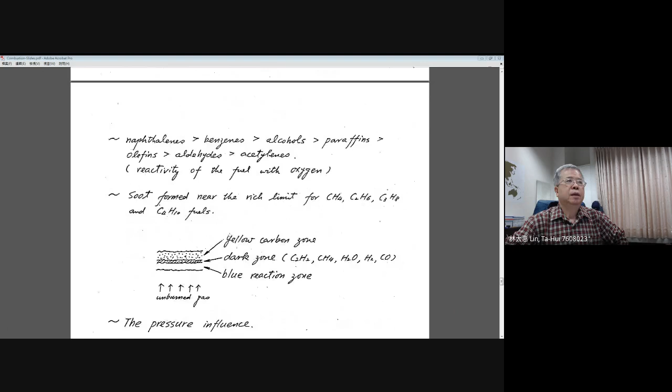Which means when you look at the molecular structure of different kinds of fuel, the soot formation depends directly on the reactivity of the fuel with oxygen by this series. Actually, naphthalene has much more potential to produce soot, but acetylene has less.

And usually from the flame structure, as we described earlier, you may see the soot usually forms near the rich limit for methane, ethane, propane, and butane, because these four hydrocarbon fuels have lower molecular weight, and the carbon-hydrogen ratio is not too high. Which means you can have soot only in very rich conditions, very close to the rich flammability limit. The rich limit means if you increase the fuel more, you may not have a flame for premixtures because it's too rich. So for these four hydrocarbon fuels, it is very hard to have strong soot formation unless you go to very rich conditions.

From our experiment, when you generate a planar premixed flame, for example like this, you have an unburnt premixture supplied from the lower burner, and you have a stagnation point flow, and in this stagnation point flow you generate a planar premixed flame, and you try to make the burning richer. In this case, from our previous experimental results, you can see there is usually a blue flame here. The blue flame exists in front of the yellow flames, and between the blue flame and the yellow colored zone, there is a dark zone.

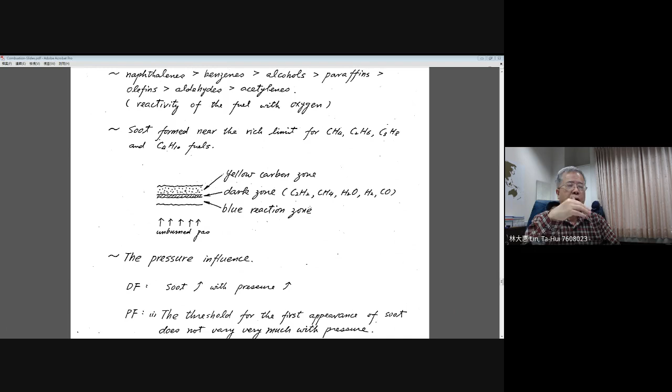And usually, if you do the measurement with GC or laser diagnostics, you can find that in this dark zone you may have a high concentration of these species, as I list here. And downstream of the dark zone, you will find there is a yellow carbon zone. That means there is a soot layer. The soot layer always exists behind the blue flame for a rich hydrocarbon flame.

And if you further look at some physical parameters, you find the pressure has some influence on soot formation for diffusion flames and premixed flames. If you increase the pressure for a diffusion flame, usually the soot will increase. Soot formation occurs on the fuel side of the diffusion flame, which means in the rich fuel region they don't have oxygen. Therefore, if you increase pressure, you increase the interaction rate between the soot particles, and they have a big chance to grow bigger and bigger. Agglomeration becomes more possible for the growth of soot.

But for a premixed flame, it depends on the situation. The threshold for the first appearance of soot does not vary very much with pressure, because the initiation of soot formation for a premixed flame is governed by the mixing ratio and also the temperature.

Pressure may not be the important one, but if you do have carbon formed, then the pressure increase will give you the chance to increase the soot formation. And the preheating of your premixed gases will increase the overall temperatures. Then you will shift the threshold for soot formation to a slightly richer premixture. That means the preheating of premixed gases will suppress the soot formation.

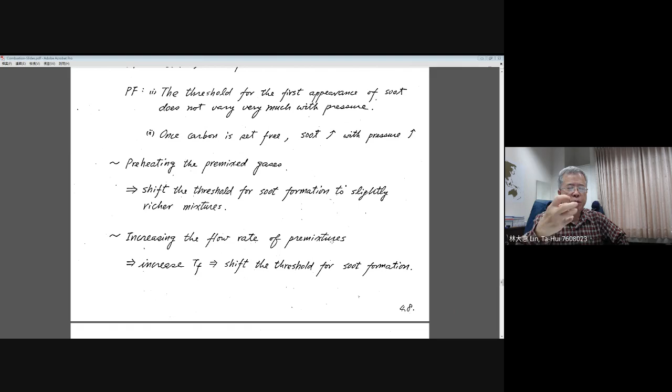Now, when you increase the flow rate of the premixture, that means that you reduce the residence time. You reduce the residence time, and at the same time, you may increase the flame temperature, because you input more fuel into your combustor. The heat release becomes larger for a given control volume. With these two factors, temperature increase and residence time reduction, the soot may not be formed as easily. Then you will shift the threshold for soot formation for the premixed flame.

But near the threshold condition, this is very important. You need to understand that near the threshold conditions, the temperature is a key factor, because it will enhance the oxidation process. But for very rich mixtures, when the temperature becomes high, it will promote the soot formation. On the rich side, you do not have enough oxygen, so high temperature cannot help the oxidation of soot, but it promotes the hydrocarbon fuel decomposition, and produces more soot.

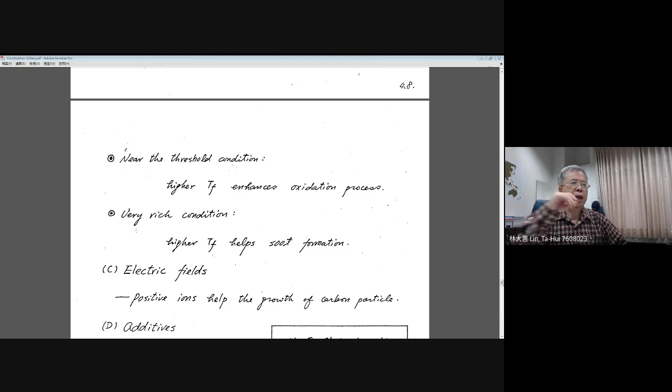This tells you about different kinds of situations, for example, different mixing ratios. Under a threshold condition, high temperature is good for reduction of soot, but for rich conditions, high temperature will help the soot formation. Just a few literature sources give you the result. Electric fields: if you can provide positive ions, those ions will help the growth of carbon particles. There are also some interesting results from previous experimental work. Adding additives will give different kinds of results.

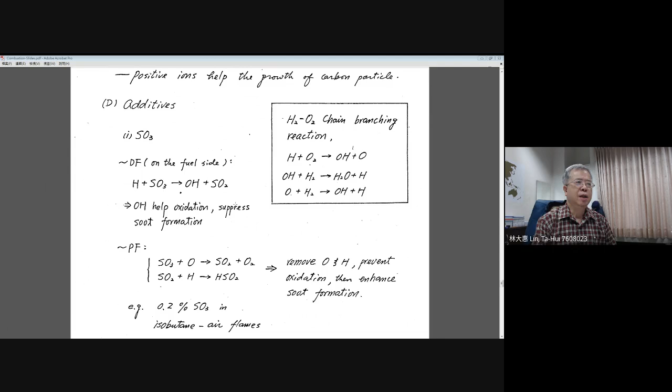Let's see, if you apply SO3 into premixed and diffusion flames, you find out they will have different kinds of results. I hope you remember, as we described earlier, in the combustion process there are three important active species: hydrogen, OH radical and oxygen radical. These three radicals are the most important species to promote the multi-step chemical reaction through the branching chain reaction.

But if you look at the influence of SO3 additives, you can find out that if you put it into the fuel side of your diffusion flame, the SO3 will react with hydrogen to become OH. Now there is oxygen, but this oxygen comes from the SO3, and this OH radical will cause oxidation, so the soot will be suppressed. This is the influence of SO3 on the fuel side.

However, if you put this SO3 species into the premixed flame, it will go through these two reactions. These two reactions absorb the oxygen; you change the active oxygen species to O2, and H is absorbed as HSO2. That means you remove the O and H radicals, and this will prevent oxidation of soot. Then the soot formation will be promoted.

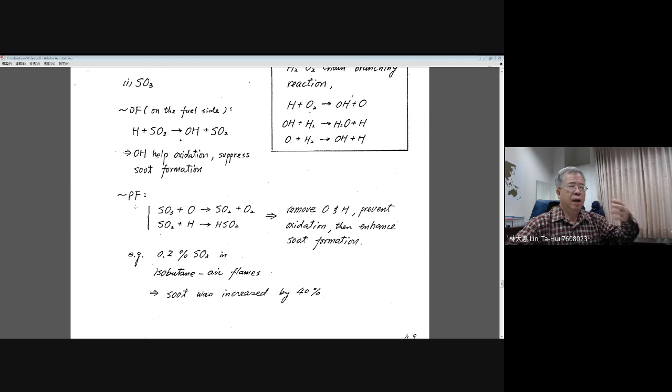Experimental results tell you that if you just add 0.2% SO3 in isobutane-air flames, the soot will be increased by 40%. This means that the influence of SO3 on the diffusion flame and the premixed flame plays different kinds of roles, depending on the chemical reactions you have on the fuel side of the diffusion flame and in the premixed flame.

Additionally, you can add some salts, for example, sodium, lithium and cesium salts. They will shift the soot formation to the richer side. That means they have a strong inhibition on soot formation. The chemical reaction occurs this way.

For lithium, it reacts with water and provides hydrogen radicals, and the next chemical reaction will produce the OH radical. H and OH radicals cause oxidation, so they can suppress the soot formation. But there is an exception for barium.

But barium, they first reduce the soot to a minimum value, but then increase soot formations. Okay, it depends on the condition you may have, especially for the mixing ratio.

Okay. Now let's look at the influence on the formation of the particles, the particulate. Later on, I will give you the picture to show the so-called coke from liquid hydrocarbon pyrolysis. That means we are looking more closely at the liquid injection through the spray atomization process.

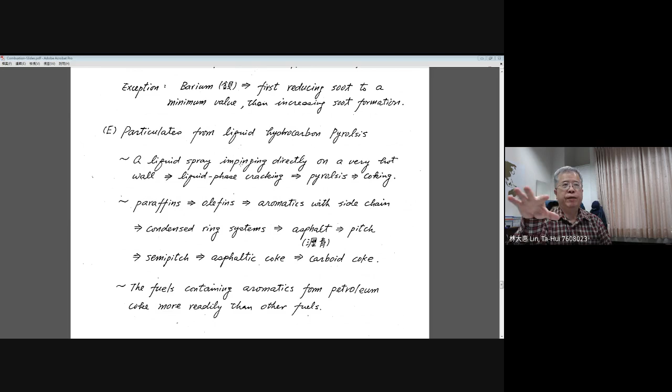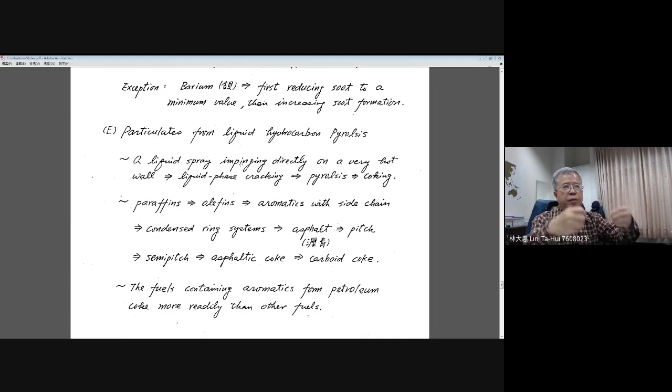Usually in our previous discussion, we were focusing on the soot formation in the gas phase, right? And in the gas phase, the soot formation initially starts from the decomposition of your hydrocarbon fuel. Then they release carbon atoms, and the carbon atoms can collect together to nucleate carbon particles in this process.

But for hydrocarbon liquid fuels, if you have a liquid spray impinging directly on a very hot wall, they will experience the so-called liquid phase cracking and go through pyrolysis. Finally, they release the hydrogen, then they produce so-called coking. The liquid phase cracking follows this way from the paraffins, olefins, continuously going through these procedures to become a carboid coke.

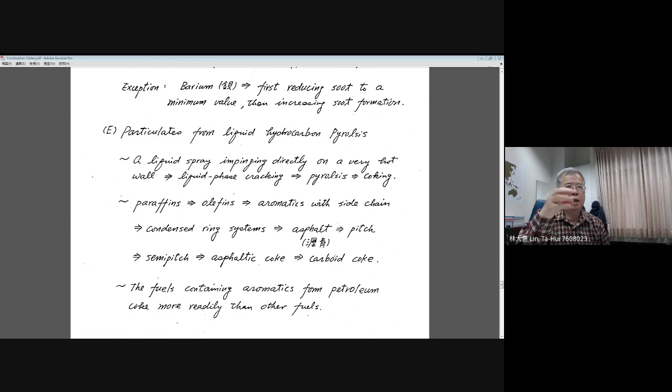And in this process, they release the light hydrogen radicals, and all the carbon remains and becomes a solid on the high temperature surface of your combustion chamber. And usually fuels containing aromatics form petroleum coke more readily than other fuels.

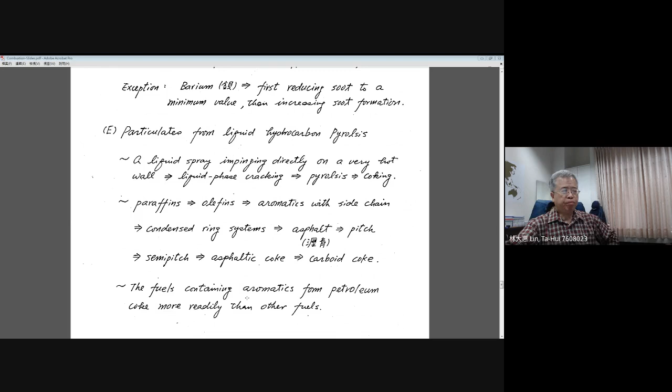Since you have injections, sometimes the spray may not have good atomization. The liquid fuel will attach to the burner head, and since the burner head experiences a high temperature, it will go through decomposition and cracking of your liquid fuel, and then finally you will have some coke attached to the burner exit.

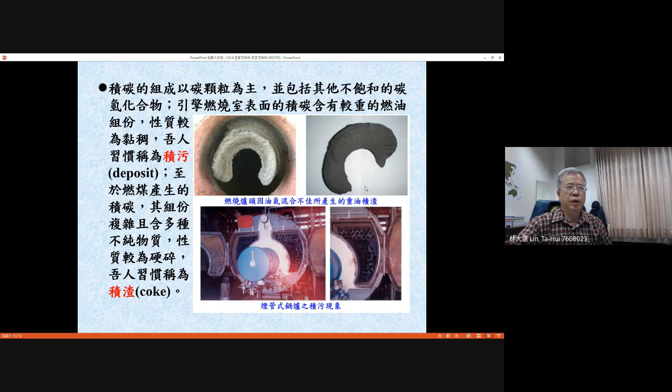And we actually did some experiments to check the deposit of gasoline. I can show you. Sorry, I moved too fast.

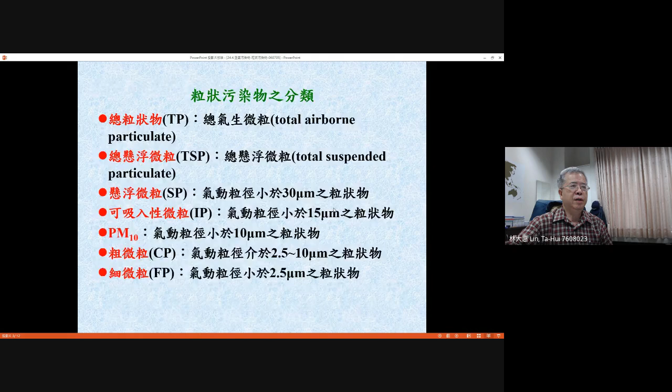For the gasoline spray burning, the gasoline has a lower boiling point and is easier to be gasified.

Then for the spray flame, usually before the spray goes through the spray flame, they are already gasified, which means that in the environment downstream of the premixed flame, actually only gas exists, the carbon particles in the gas phase, and when those soot occurrences appear, they will hit the plate, then they will form on the surface of the plate. The distribution is very uniform, but basically it gives you the idea. It is just the attachment, the deposit of your solid particles, carbon particles, on the plate.

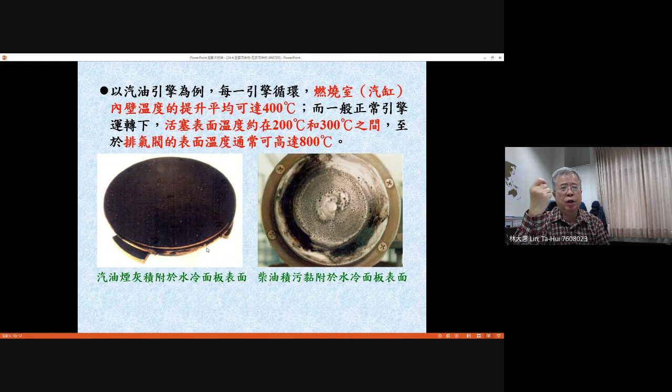But for the diesel, actually they cannot finish the gasification of the diesel droplets. They still remain liquid droplets, and then those liquid droplets impinge on the plate, and in a very short time they go through the cracking process. Then they will produce the coking on the plate. Okay, they are completely different. This is an example to give you some experience of the behavior of coking with liquid petroleum fuel.

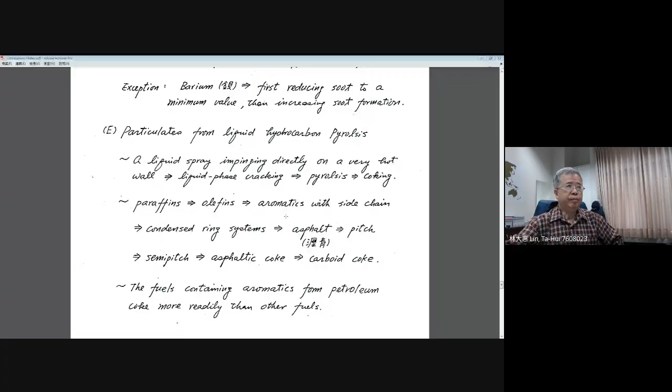Now we go back to our lecture slides, and we will continue, because we finished the discussion on soot formation, and we need to go to the next subsection to let you know how we can remove the particulates from our emission process. There are several pieces of equipment to be used. I will show you quickly.

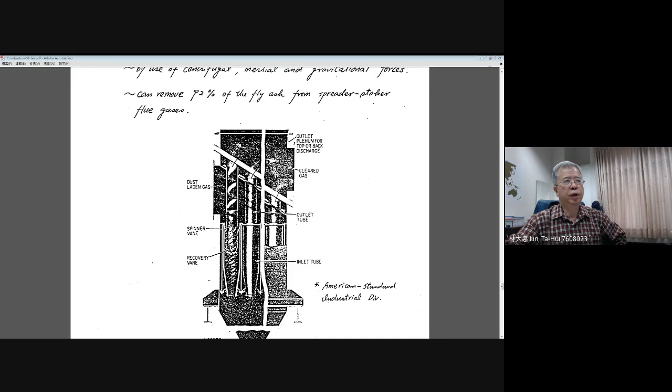The first one we call mechanical collectors. Basically, these kinds of mechanical collectors operate based on centrifugal, inertial and gravitational forces. Let me try to explain. If you look at this picture, this is a typical mechanical collector. The dust-laden gas coming from the combustion chamber flows in from the left hand side, and when it moves into the collector, it will first flow downward, then reverse and flow upward through a spinning vane.

By this change of flow direction, you see this gas has some dust, right? There are particles of different diameters laden in the flue gas, and by changing the flow direction, large particles will have inertia and be influenced by the gravitational force. They will fall down to the hopper. The flow will continue to change direction, then flow upward through the spinning vane to produce the centrifugal force, and this centrifugal force will additionally move the medium-sized particles to attach to the surface of the vane, then they will fall down because they lost their inertia.

Later on, the cleaner gas will continuously flow upward through the upper deck, then the clean gas will flow out. By this flow arrangement, inertia and gravitational force act on the flow to let the larger particles fall down to the hopper, and later they use a centrifugal force to push the medium particles to attach to the surface of the vane, and they will fall down because they lost their inertia, and those medium-sized particles will be collected. But very tiny particles will still flow with the gas and move out.

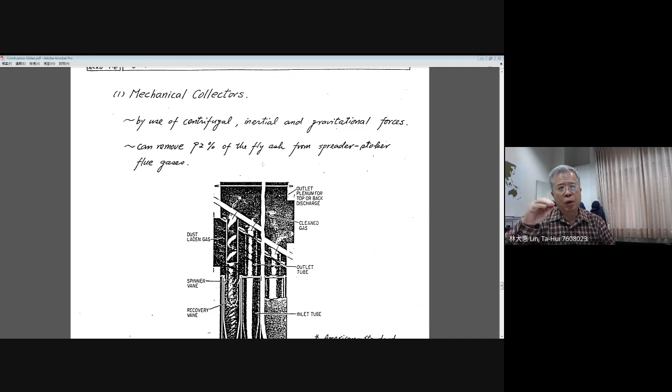This means that by using mechanical collectors, they can remove only 92% of fly ash from the spreader stoker flue gas. Spreader stoker flue gas usually contains a large amount of particles, and mechanical collectors do not have very high efficiency, just 92%. The 8% of the fly ash may contain smaller particles, and they will flow out. But for mechanical collectors, the cost is less, only 1/8 that of electrostatic precipitators or baghouses. But electrostatic precipitators and baghouses have a higher efficiency for removing the particulates.

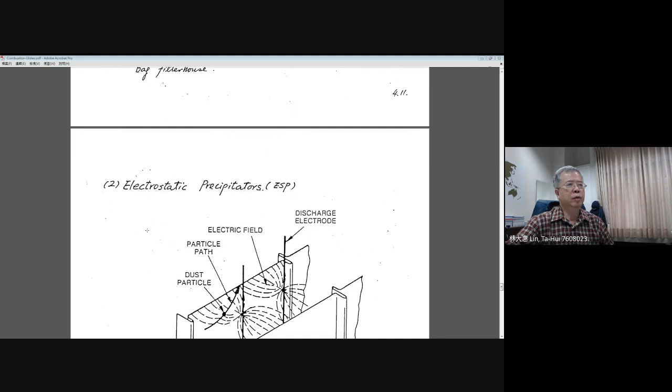Okay, here there's a discharge electrode. You have discharge electrodes, then they will produce the electric field based on the conjunction of the plate with the electrode. Then you will produce the electric field. Initially the particles inside of your flue gas were charged. When those particles move into the region between these two plates, they will change their direction of flow and attach to the collecting plate.

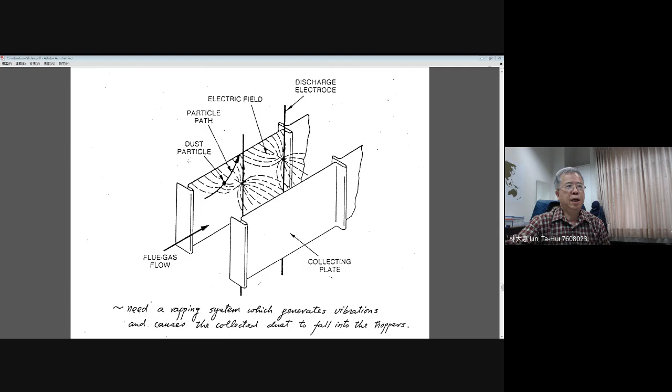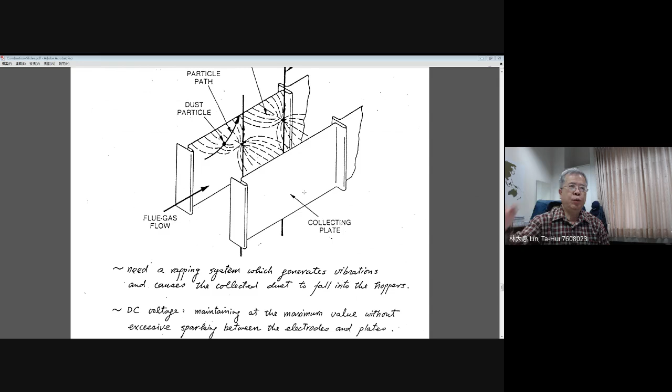And this tells you the dust particles will move along this path and attach to the collecting plate. By this influence, the charged particles will follow the electric field and attach to the plate. And after a certain time of collection, you can shake the collection plate to let your particles move downward. Okay, here they tell you you need to have a rapping system. Then it will generate the vibration and cause the collected dust to fall into the hopper.

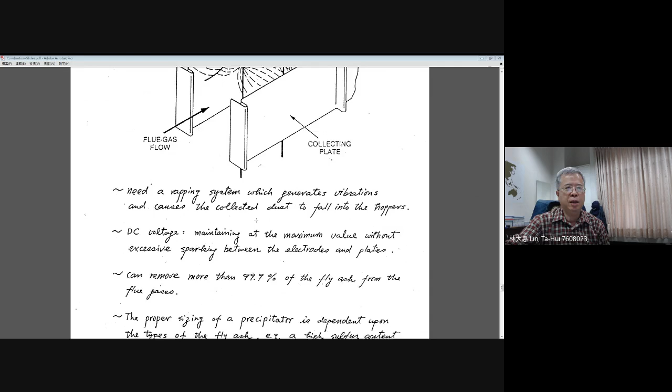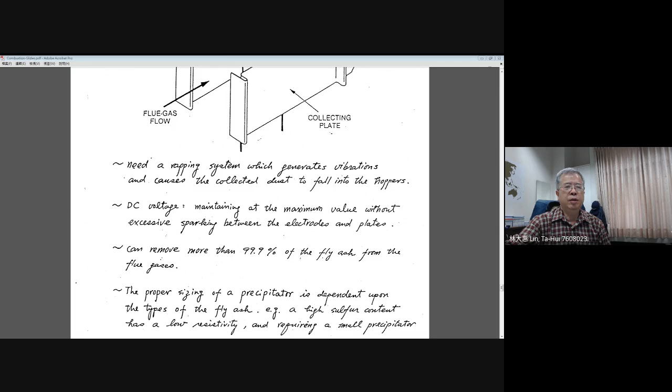Okay. And this equipment can remove more than 99.9% of fly ash from the flue gas. And this is a very nice efficiency. Usually, large fire power plants are equipped with this ESP to remove the particulates completely. Therefore, people usually believe only a very small amount, only 0.1%, very tiny particles flow out through the chimney of

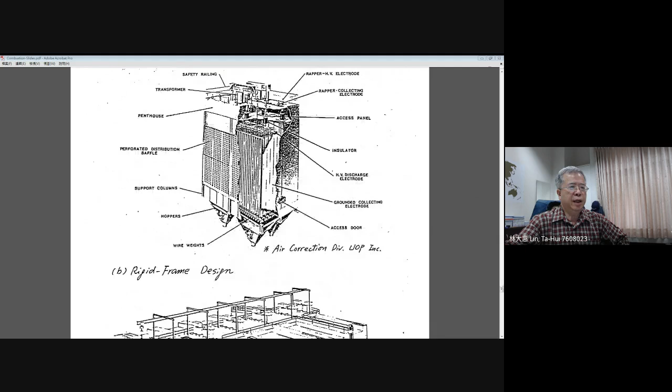the fire power plants. Okay, and here they tell you the proper sizing of the precipitator depends on the type of fly ash, especially high sulfur content has a low resistivity and requires a small precipitator. Then I will tell you how it works and the influence on that. There are two different kinds of design. I skip it to not give you the detailed description, but I want to tell you how to arrange those equipments for the flue gas.

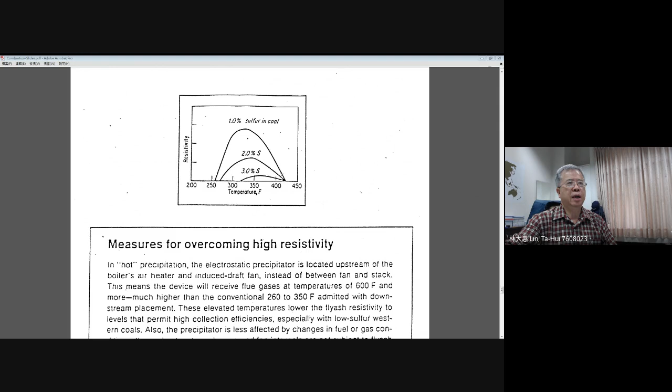Okay, this is a typical example. If you have a lower sulfur content, for example, you use coal as a fuel for your furnace or your boilers, then you will find out the resistivity distribution is something like this in the temperature range. Actually, they will have a higher resistivity in a larger temperature range. But if you increase the percentage from 1 to 3%, you will find out the resistivity becomes smaller, and the temperature range becomes smaller.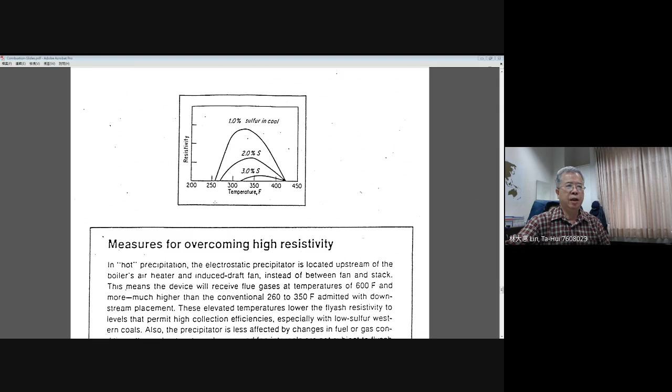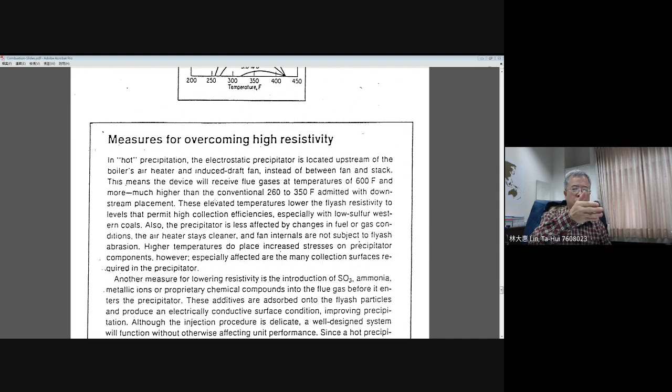Okay, which means if you have a larger sulfur content, then you will have a high collection of the soot particles. Then usually people try to arrange their precipitators very close to the boiler outlet. We call this a so-called hot precipitator. Hot precipitator means that it will experience the flue gas with a high temperature.

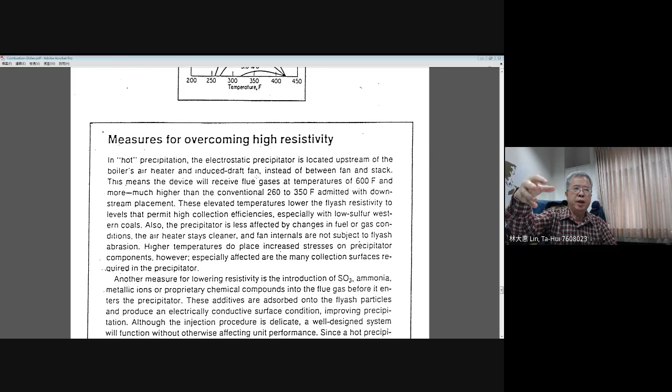And the precipitator is located upstream of the boiler air heater and induced draft fan, because the flue gas will flow out through the boiler, then go to the air preheaters to preheat the inlet air for the boiler. Then it will go through the induced draft fan to the chimney and flow out.

Okay, but they try to arrange the precipitator ahead of both the air heater and the ID fan, because it will experience a high temperature, around 600 Fahrenheit, and sometimes it is more efficient to collect the soot particles. In this situation, the particles still contain a certain amount of sulfur, because they do not go through the desulfurization. Usually the desulfurization is put very downstream in the whole stream.

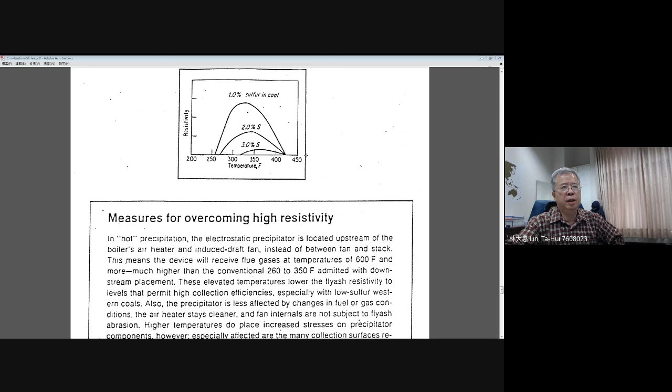Okay. So the higher temperature will give you a higher efficiency to collect those particles. For example, for this range, 450, when you go further, the resistivity for your coal particles, the carbon particles, is almost near zero. They are easy to be collected.

And this is good for the operations of the air heater and the induced draft fan. Since before the flue gas flows into the air heater and the ID fan, all the particulates, soot particles, are collected by the precipitator. Then the flow will be purely a gas flow.

If you cannot remove those kinds of particulates, then those particulates, as I mentioned, even though their size is very small, the flow velocity will carry them. Then they have a certain amount of momentum when they impinge onto the surface of the air heater or the blade of the ID fan.

They will produce some pitting and a corrosion problem. But for the hot precipitators, there is another problem you need to solve, because they put the precipitators closer to the boiler exit. That means the flow has a higher velocity. The most important thing to consider for a precipitator is the flow time.

Since you have a plate, right, you need a residence time to let your particles change their directions and be attached to the surface of your plate. Then for the flow time, if you have a higher velocity, you need a larger plate to accept the flow and reduce the velocity. Then they will be more attached to the surface.

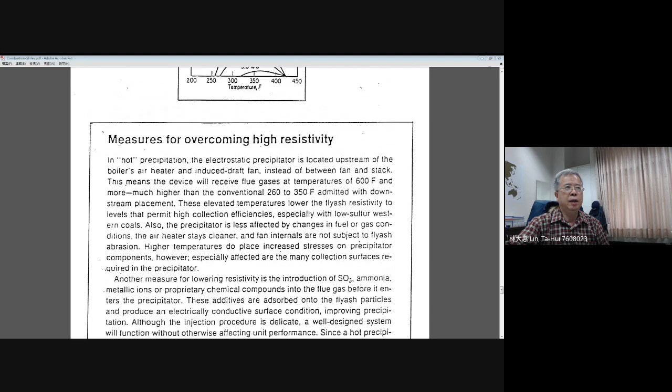Then people try to introduce SO3 or ammonia, those agents, and they will produce lower resistivity, as I explained earlier. In this case, when you go to the lower temperature regions, if you increase the sulfur content, you will reduce the resistivity of your particles, and that will improve the collection efficiency. This is some practical arrangement for precipitators.

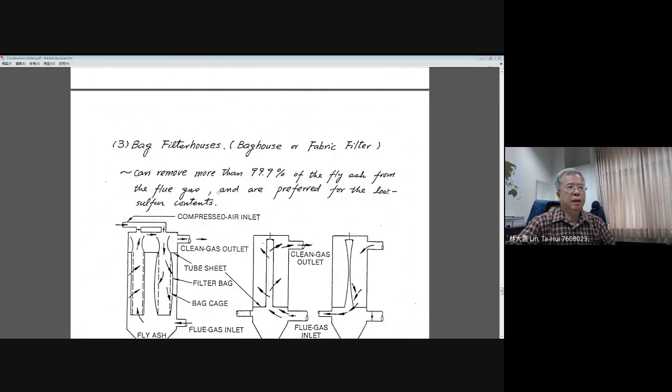Now the third one is still a useful one. It is the baghouse filter, or we call it a baghouse or fabric filter. They still can have a high efficiency. They can remove more than 99.9% of fly ash from the flue gas, and are preferred for low sulfur content. We already emphasized precipitators are good for the high sulfur content, which means they are more likely to be used for coal burning.

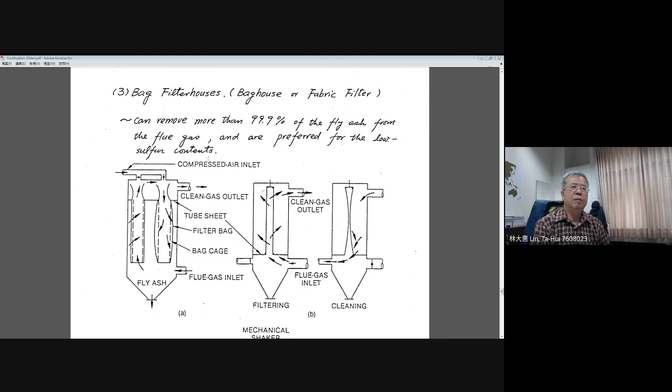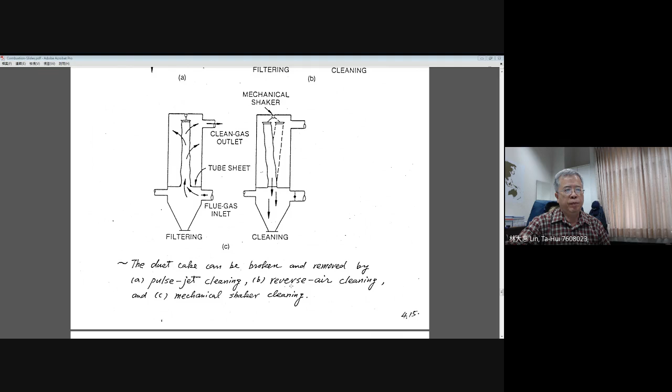But if you do not have a large amount of sulfur content, you may use the baghouse. Here this is the mechanism for different kinds of applications. For the baghouse, figure A represents pulse-jet cleaning. Figure B represents reverse air cleaning. The final one is mechanical shaker cleaning. I will give you an example to explain it.

And the clean air will go through this way and flow out. This is the clean gas outlet. The other one is working on the cleaning process. The left-hand side tells you that you will have some soot particles attached to the surface of your bag. Then in the second step, you change your flow condition.

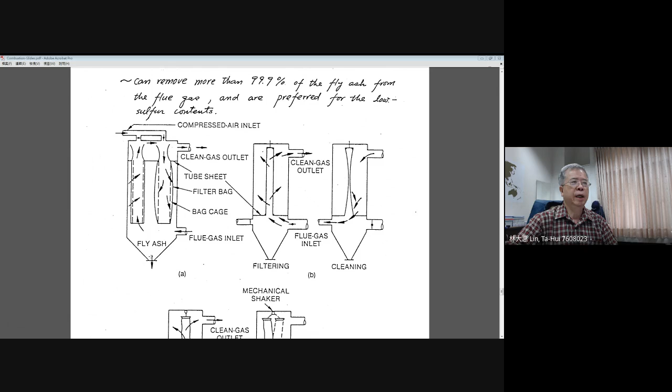Now you use compressed air from the top part. There is the tube; the compressed air comes in, flows into the interior of your tubing, and flows outward through the filter surface. By this flow motion, the compressed air will push those deposited particles to drop to the hopper. Therefore, you may have a series of bags acting on the collection of your particulates, and the other one just pushes out those deposited particles to fall down.

Okay, by this way, they can clean out all the particulates and then the clean gas moves out. Okay, and then the right-hand side, figure B, tells you they are separate. Okay, and they use a very similar way. This figure tells you flue gas comes in and flows out, and the particulates will deposit on the surface of the bag.

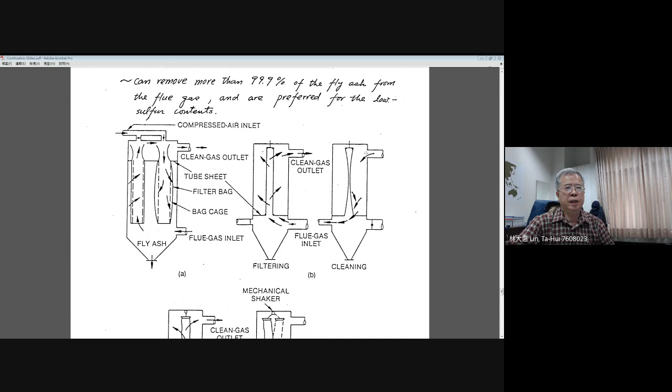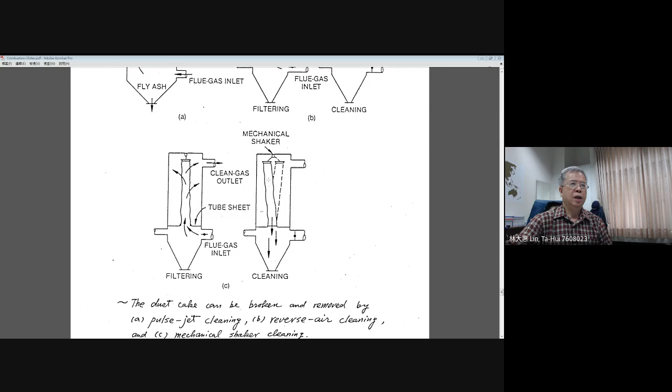And on the right-hand side, they go to the cleaning process, then they have compressed air move from the other way and push those deposited particles to fall down. Okay, and the last one, they just use a mechanical shaker to shake the bag, and the collected particles will fall down.

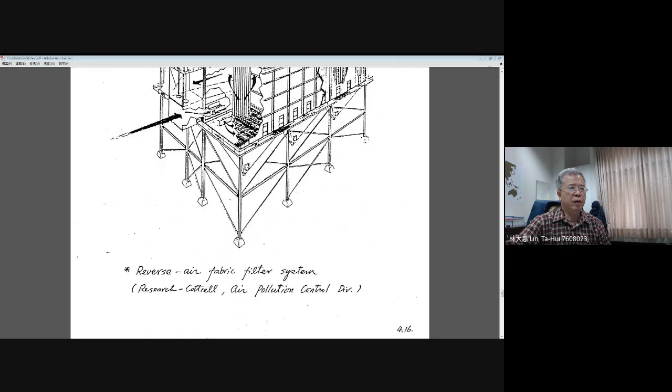And the most important thing there is the design to achieve higher efficiency based on the air-to-cloth filtering ratio. Depending on how much flue gas you have, you use the gas volume flow rate divided by the bag surface. The typical design for high efficiency is that this value will equal 0.5 to 4 centimeters per second. Okay, and this is a typical arrangement for the reverse air fabric filter systems.

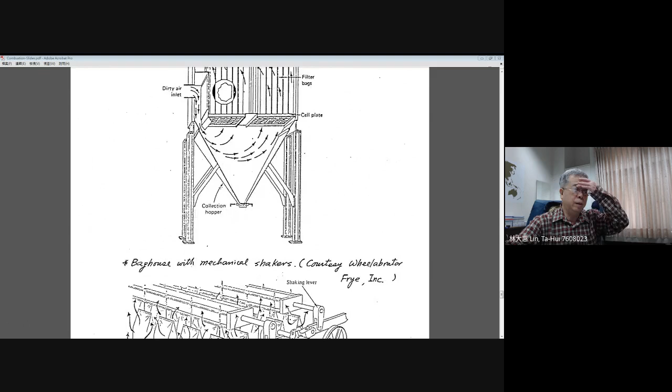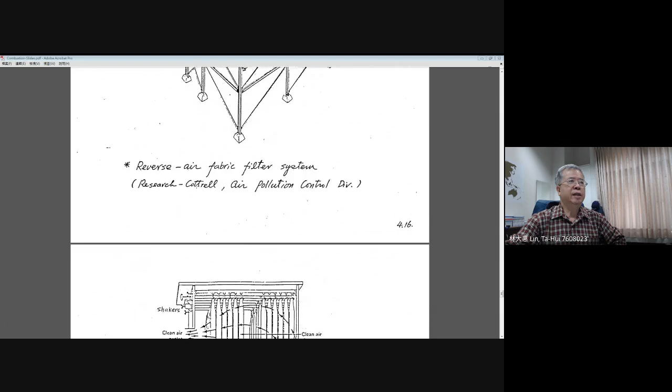And you can see this is another one with two different streams, the dirty air inlet and the clean air outlet, and then they use the shaker to shake down the deposited particles into the hopper. And this is some arrangement for, I think this is just like a pulse jet, as I mentioned in figure A. Yeah, the pulse jet cleaning systems. Okay, this just gives you some understanding of the arrangement.

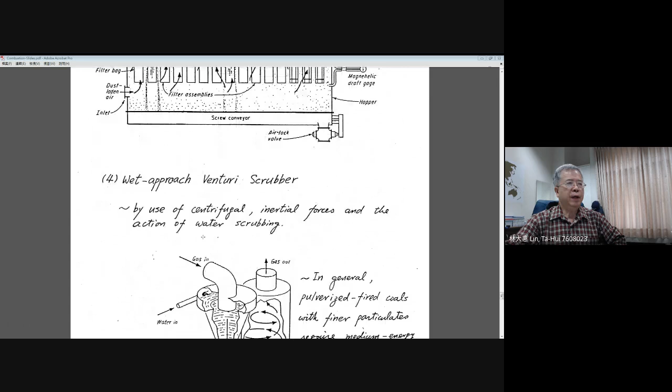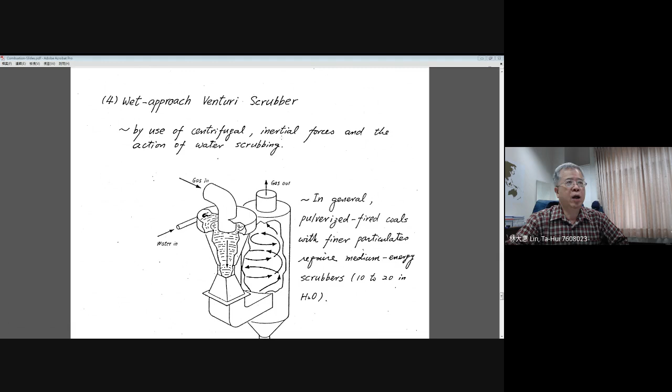Okay, the final one we call the wet approach, the Venturi scrubber. Actually, this scrubber is used in many classical or old systems. They use the centrifugal force, inertial force, and also add water for the scrubbing. Here you have a flue gas in, and there is the scrubber. Here you have some water, and because the water comes in tangentially, it will produce a swirling around the surface of your scrubbing system.

When you have gas flowing in, the gas will interact with the water, and some particles, since they have weight, because large particulates have inertia, attach to the water surface, merge into the water, and are carried out. In general, pulverized coal firing with fine particles requires a medium-energy scrubber. The energy consumption for this scrubbing system is quite large, because you need to generate a higher flow rate for the water and the swirling motion, which requires a large amount of energy.

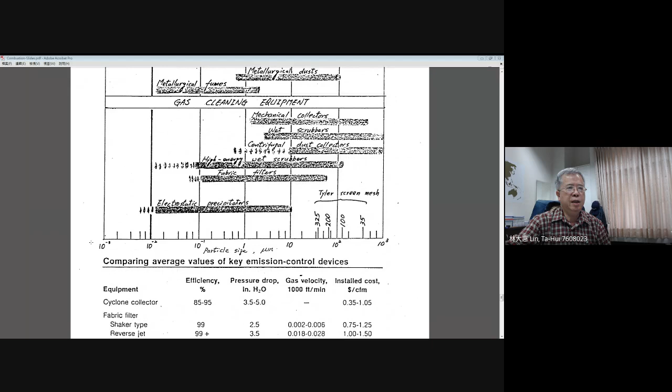In general, I think this is a very nice picture to let you know how to use different kinds of cleaning equipment for removing particulates in different applications. Here, the horizontal axis represents the particle size. From left to right, the particle size increases continuously. The upper part represents the particles generated from different applications. For example, the carbon black industry produces particles in this range, and oil smoke in this range; those particle sizes are quite small. Even the diameter of a gas molecule is shown for comparison.

For our energy application, there is the pulverized coal fly ash. It exists from lower than 1 micron up to around 100 micron, 1 to 100 micron in this range. Okay, and the cement dust has larger particle sizes, from 10 to 100. Okay, and pulverized coal has even larger particles, up to 350 microns.

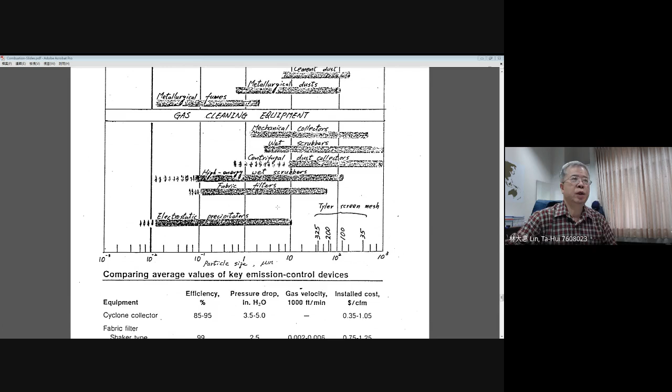You can check the size of the particles made by different kinds of applications, and figure out what kind of cleaning equipment needs to be fitted to more efficiently remove the particles. For example, if you use the electrostatic ESP systems, you will find they collect particle sizes from 0.01 up to 10 micron, okay, in this range.

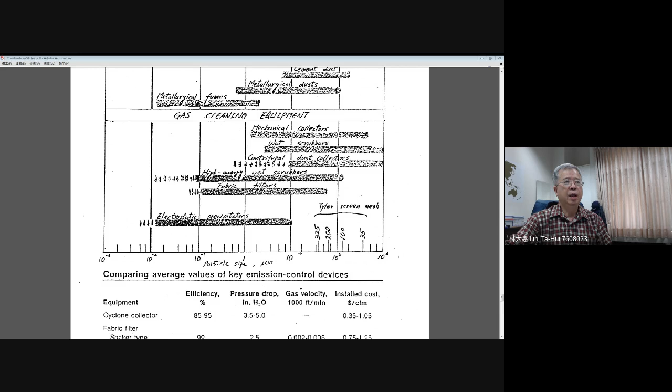And you will choose the fabric filter, the baghouse, and the range is from around 0.1 micron up to very close to 100 micron. And they can efficiently remove the particles, for example, from pulverized coal fly ash and oil smoke.

Okay, and those mechanical collectors and wet scrubbers can have a good performance removing large particle sizes, but they do not have good efficiency removing the very tiny particulates, small particulates. And there are some comparisons on the key emission control devices. It is just a comparative result, and you think about how to choose.

For example, here, in terms of efficiency, you can see the filter and the precipitator have a higher efficiency. And if you want to use the scrubber, they can increase the efficiency a little bit higher, and they can reach 98% for medium energy. If you do not use too much energy, that means you reduce the supply of water, then the efficiency

will become lower. And in terms of pressure drop, when you do this kind of cleaning, the flue gas goes through the equipment and produces a pressure drop. Then another problem occurs because the flow cannot move smoothly out of the chimney. You can see the cyclone collector, because it reverses the flow direction, produces a high pressure drop. But the filter still has a high pressure drop.

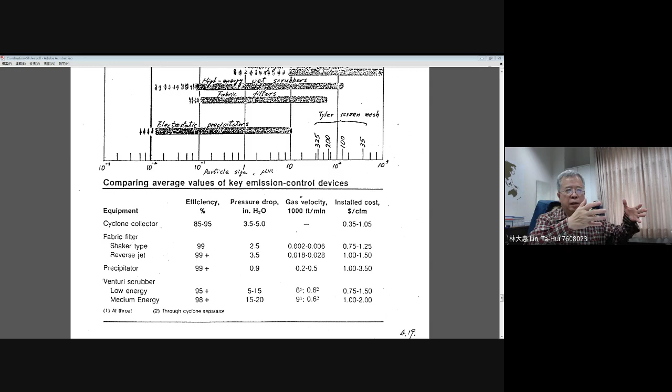But the precipitators do not have a change in the size of your flow stream or direction. Then the pressure drop is the minimal one, and you can let the flue gas still have momentum to flow out through the chimney. Okay, and the gas velocities usually have some range. For precipitators, they require the gas velocity a little bit larger, and since they are always put in a location very close to the boiler, they have a higher velocity.

In terms of installation cost, definitely the fabric filter baghouse and precipitator have the highest investment. In general, when you look at selecting emission control equipment, there are four key factors you need to consider. The first one, the property of your delivered fuel. If you burn natural gas, you do not need particulate removing equipment, right? But if you burn coal, then you need to have a baghouse or ESP.

And the second one is the size of the boiler plant. This is very important. We just mentioned electrostatic precipitators are not generally recommended for plants below 40,000 and up to 50,000 pounds per hour of steam, because precipitators require a large space to install the collecting plates, and it depends on the flow velocity of the flue gas. But if your boiler plant is small, you don't need to use it. Maybe you can just use the baghouse.

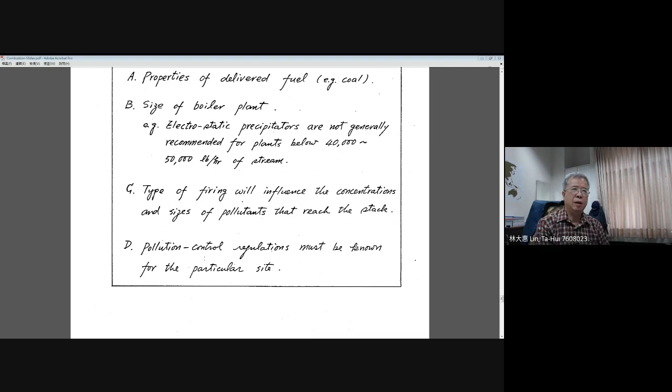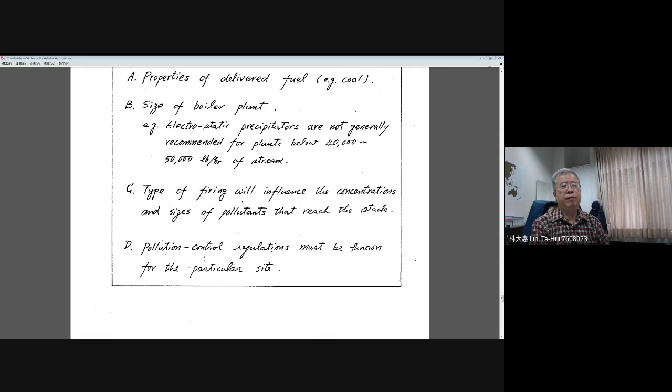And you cannot say in this region you can have some flue gas moving out without cleaning. Usually you need to have this sense: you need to try to remove all the pollutants in different places. Okay, we finished the discussion on particulates. Next, we will move to the introduction on nitrogen oxides.